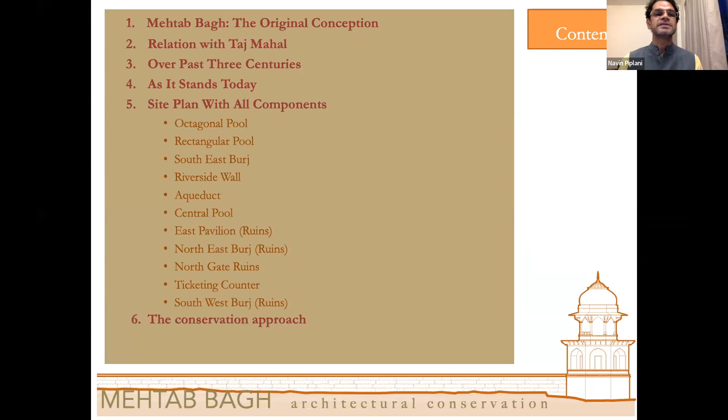This is the basic structure of the presentation today. We look at the site. We look at the relationship of the site with Taj Mahal. And how it was over the past 3 centuries, as it stands today, the site plan, and the conservation approach.

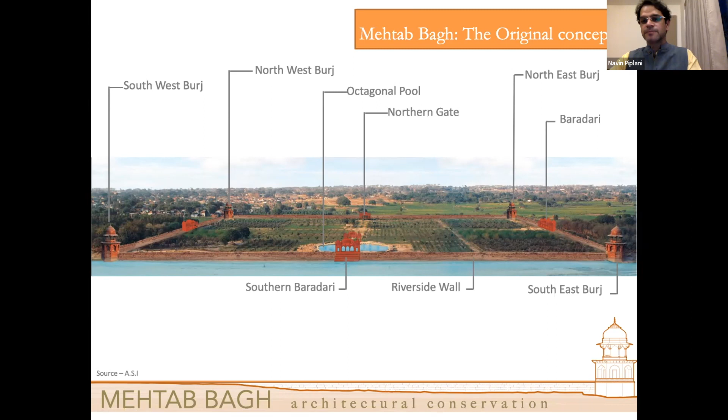Now, just on the side, most Islamic tombs, most Islamic gardens are in the center of the garden. The tomb is in the center of the garden, and Charbagh is around the tomb. It's only in the case of Taj Mahal that the tomb is moved near the river, to the edge of the garden, and therefore on the other side also the octagonal pool is moved to the edge of the garden.

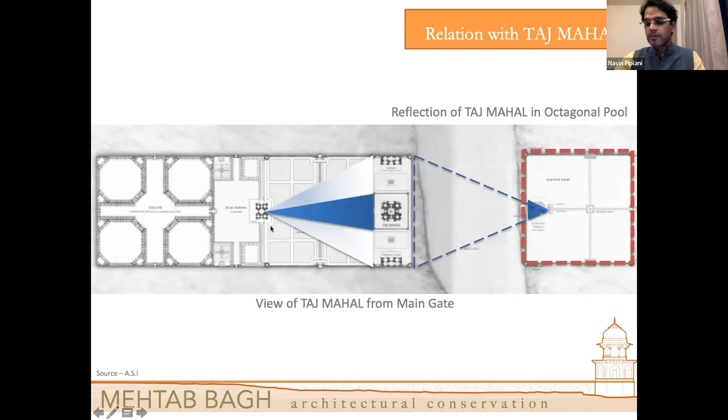That's the view of the Taj. Many of you may have visited the Taj from the pavilion. From the main gate here, this triangle originating from this platform. If you look at the Taj, you would see that, and a reflection of the Taj in the channel that leads up to the Taj.

And again, sharing a little bit of insights that we had while working. The Emperor Shah Jahan, who built the Taj in the loving memory of his dying wife, would walk on this path, on the red sandstone path. He would not walk on the path that we walk today as visitors. He would walk right next to the water channel with the fountains. So it is called the Shah Jahani path that would lead up to the mausoleum.

Now, on the right-hand side is the image of Taj Mahal as reflected in the octagonal pool, which I showed you in the drawing.

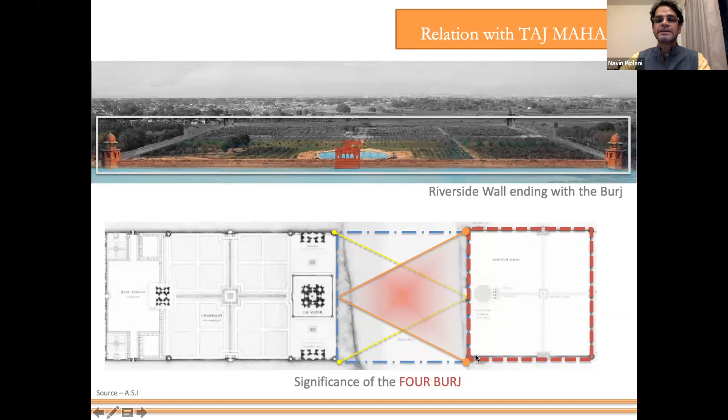So on the other side is the Mehtab Bagh, this red square, blue square is the river, and the black big rectangle on the left is the Taj Mahal. That you need to keep at the back of your head. This is how Mehtab Bagh was between 1632 and 1643, the site with the octagonal pool. And then the whole site got flooded. There are descriptions by various travelers that you would not see the Mehtab Bagh from across the river. And eventually it was all excavated in sections, and the pool came to the surface. And then there was overgrowth of vegetation in this part of the site because nobody was visiting this garden site. Everybody was only interested in the Taj Mahal.

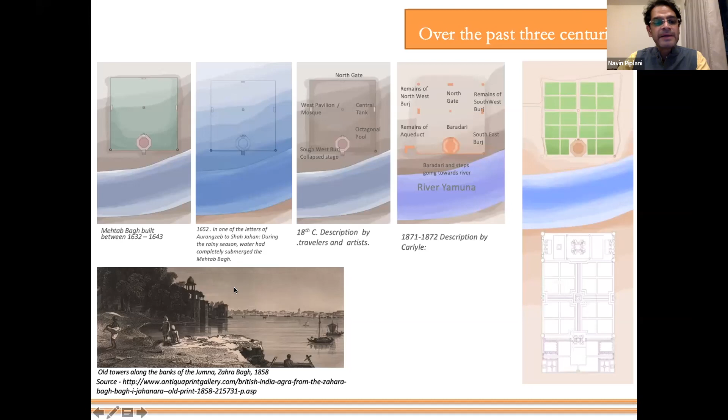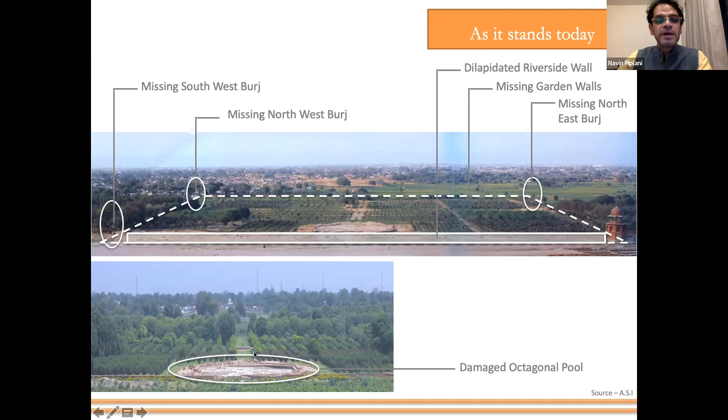This is one of the views of how the Mehtab Bagh site would have looked. And there are some interesting revelations coming up, which you would have heard or read, but we got a huge privilege to be able to provide evidence for that. So currently, there's only one burj, this pavilion, standing. All three other pavilions are not there. This is the current situation. The wall which divided the site from the river is more or less gone, and the inside of the garden is not exactly as it was. The pavilions are not there, and so on. And the octagonal pool is quite severely damaged.

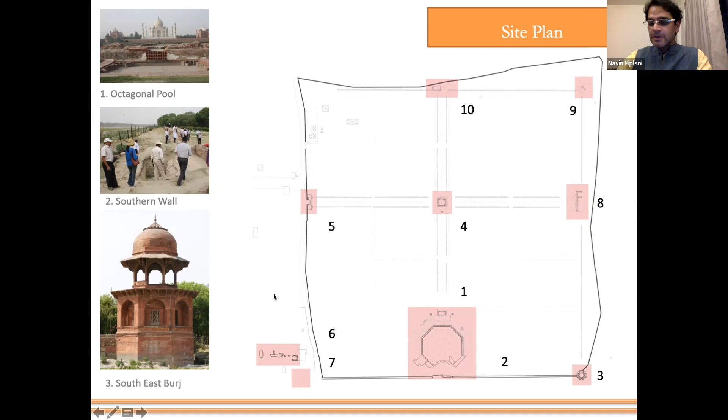This is the site. This is the pavilion. These are the work teams, and this is the pool, number one. Number two is the wall. Three is the burj that is standing. There was again a central tank. There were pavilions on the three walls. And then 6 and 7 was the water system to draw water from the river Yamuna, and it was used for watering the plants and the trees at the Mehtab Bagh and for its upkeep.

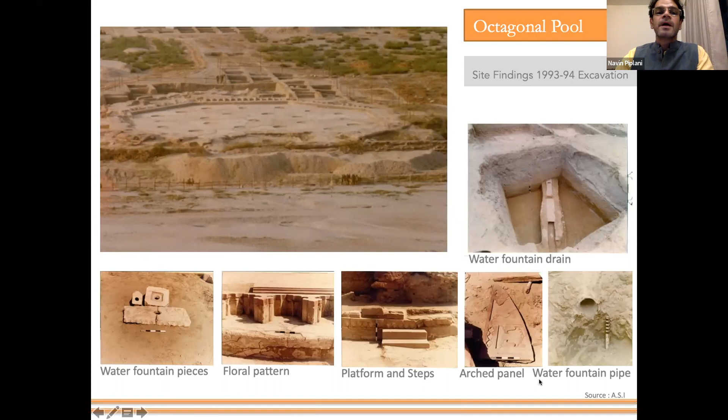So this is what the pool looks like after it was excavated. You see this deposition of sand along the wall. The fountains are gone, the baradari is gone. These are the excavation pits by the Archaeological Survey of India. And they were finding pieces of fountain, the floral pattern, the platforms, the arched panel, water fountain. This is all archaeology that was revealed, and then it was covered back. Severely damaged pool. It kind of got submerged in the waters of the river. And then when they excavated, they found it in this really sad condition.

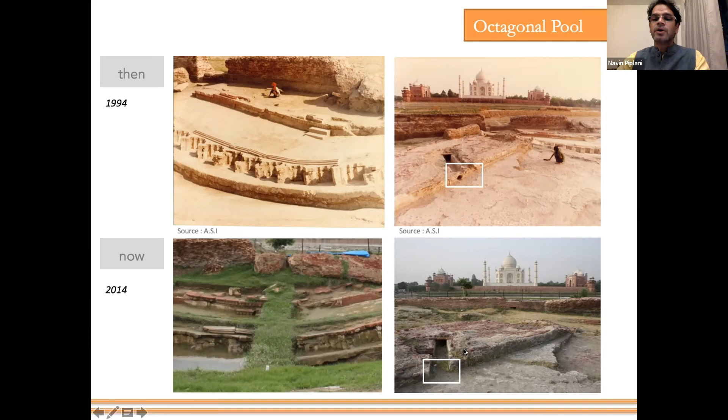And across the river, you see the view of the Taj Mahal. This is the same distance from the other side, which I showed you in the triangle. So this is how you see the Taj from the other side now, with all the trees and the vegetation gone. But if you came to the Mehtab Bagh side, then you would see the Taj Mahal in its original, authentic setting, how it would have been several centuries ago.

So the conservation team at site, this is a rectangle pool, octagonal pool, the Taj. You see how interesting it is actually. Something which is the object of attention from the other side is now in the backdrop. And we are more busy looking at the archaeology and the damage and the destruction than the Taj Mahal. That is, thousands and millions of people come to India to look at the Taj, and it's gone to the background. But this is exactly how the narrative of Taj Mahal is.

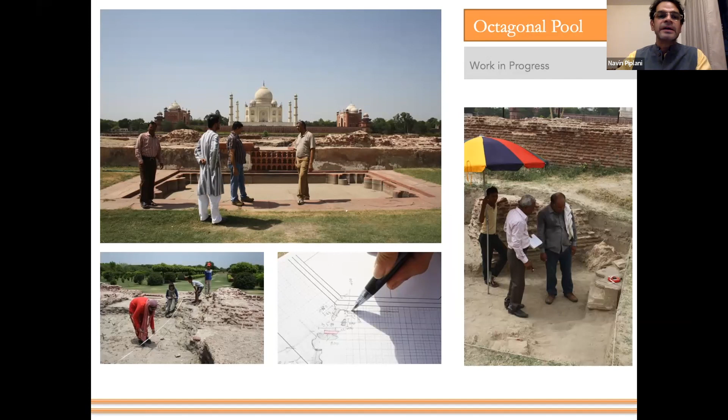It's a mausoleum. It's not a Disneyland kind of a thing where you got to celebrate, you got to do your picnic, take pictures. It's a mausoleum which reminds you of the sadness of the emperor who lost his most loved wife, and therefore it's a reminder of that loss rather than celebration of some kind of world heritage and this, that, and the other that it is subjective to.

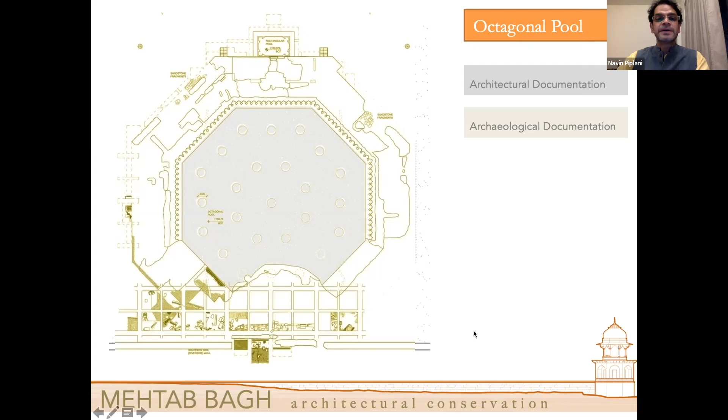Anyhow, this is how the architectural documentation of the pool was taken up, which was then overlaid by archaeological excavations, the excavations that were done by the ASI, and some bit of exploration was done while the project was on. So this grid at the bottom actually reveals the pieces which got damaged and which stayed in situ. So these pieces, stone pieces, are still there. And then the condition mapping was done over this site.

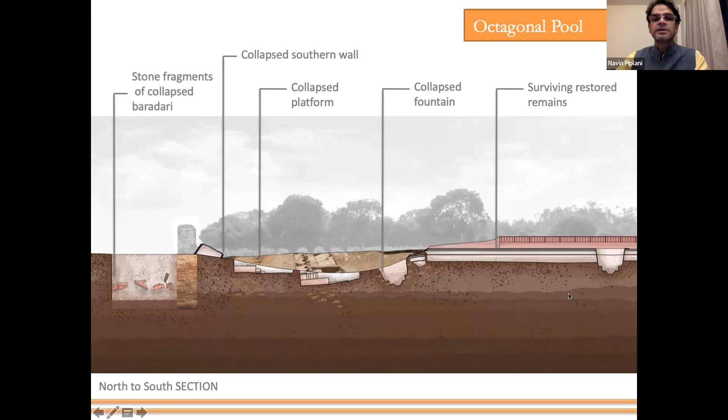This is a section that shows how the octagonal pool is in a sunken situation, with actual pieces to scale, lying as they were, buried under the earth, and the remaining part of the octagonal pool on the right-hand side. And now looking from the other side with Taj Mahal in the backdrop.

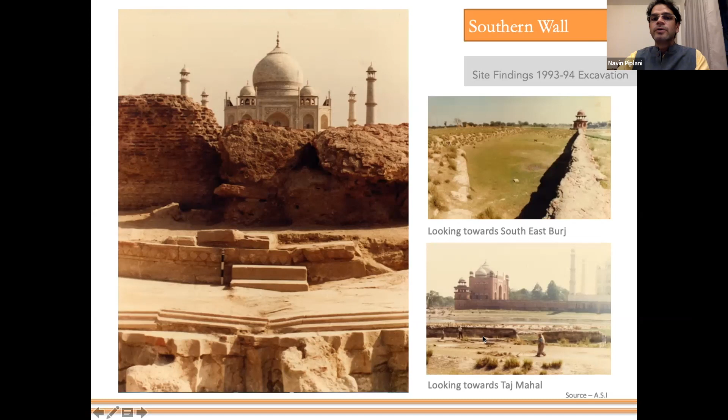This is the southern wall that I talked to you about, where it's quite a close-up. It's a real photograph. It's not photo montage. It's a real photograph of how it looks when you get so close to the wall and you look at the Taj. The wall totally damaged in pieces, and a lot of it was vandalized also because nearby village people took the stones away to make their houses and other structures.

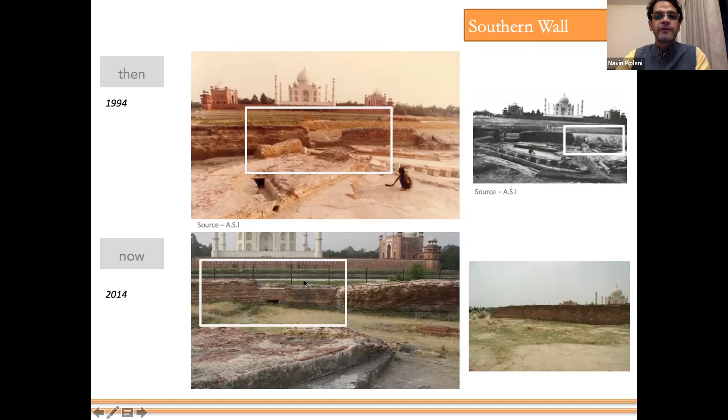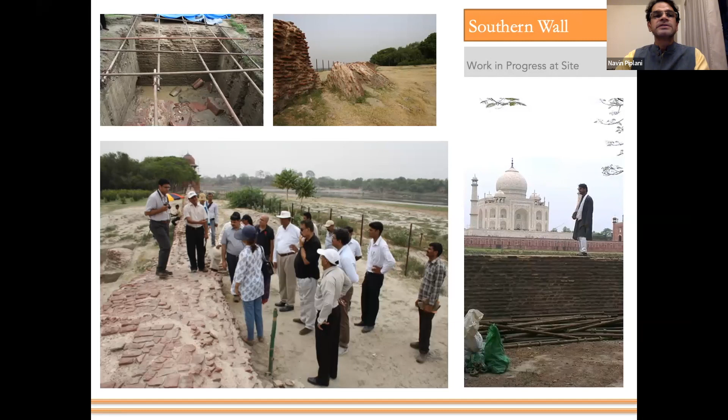But there were some evidences of water channels, as how water would have been brought into the octagonal pool, and when it overflowed, how it would have been thrown out back into the river. Now we are standing on the wall, the southern wall, and looking at this condition with engineers from IIT Madras and seismic experts and experts on geology and hydrology, because the major cause of damage to the site was floods. And again, the documentation of the site, the wall, and condition mapping.

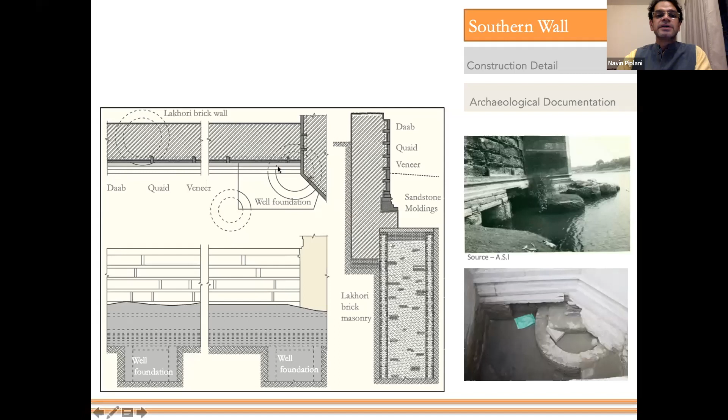Now, this is that interesting piece of information that everybody around the globe wants to know: what was the foundation system? How is it standing? The images to the bottom right and bottom left show you the wells, which is the modern day pile system. So this is a section that we had drawn to show how these masonry wells, which at that time were filled with timber, provided the foundation system for the wall and the burj, and which is exactly the same system which is on the other side on the Taj Mahal. So the entire foundation system of Taj Mahal sits on these circular wells, which are modern day piles.

A section showing how these pieces are lying buried under the ground, and the burj itself, the only lone survivor of this entire site. And you can see in the photographs how some parts of these wells are also still surviving and just keeping the site standing in place in quite a vulnerable situation. Now we are right at the well.

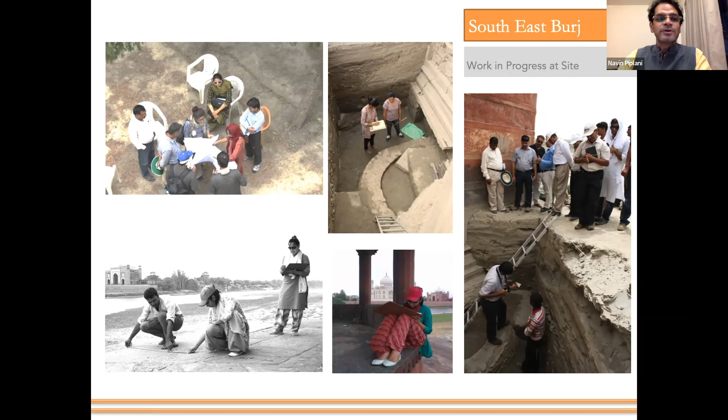So you see the excitement to an archaeologist or to an architect to go down several hundred years back and stand at the level at which the well is, where these two girls are standing, and study that site. So you're almost 400 years back studying how the whole system of buildings would have been erected in the first place. And then came the question of restoring it much later.

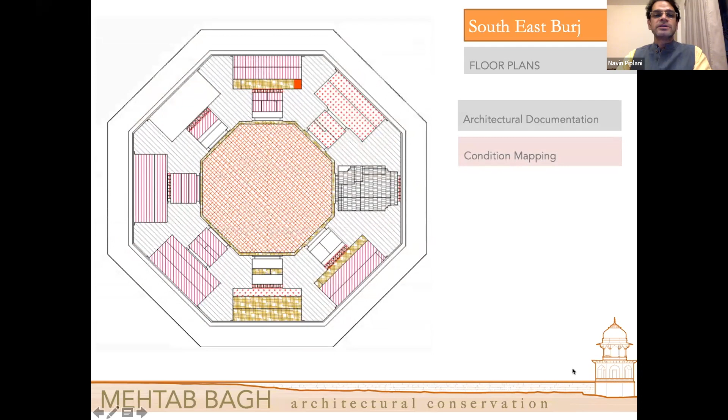These are the floor plans of the burj. I'm just showing you as a matter of documentation, not getting into the conservation of it, but how meticulous this entire site was. There's only one element left, the burj, and how it was meticulously documented and condition mapped for the conservation problem. That's the roof plan, beautiful structure, beautifully proportioned. And this is, out of the 4 burjes, the only one left, the section there, that elevation on the right.

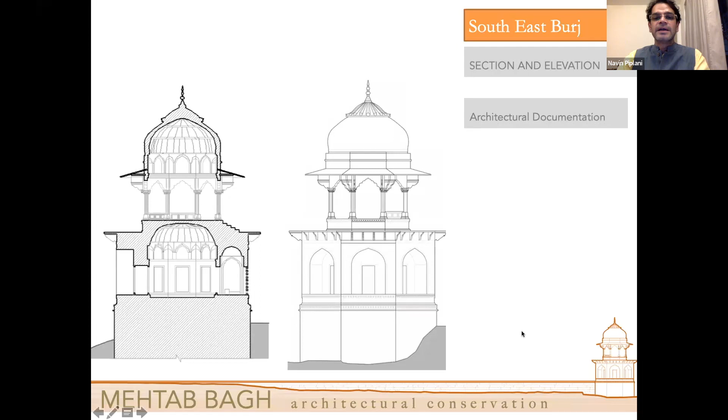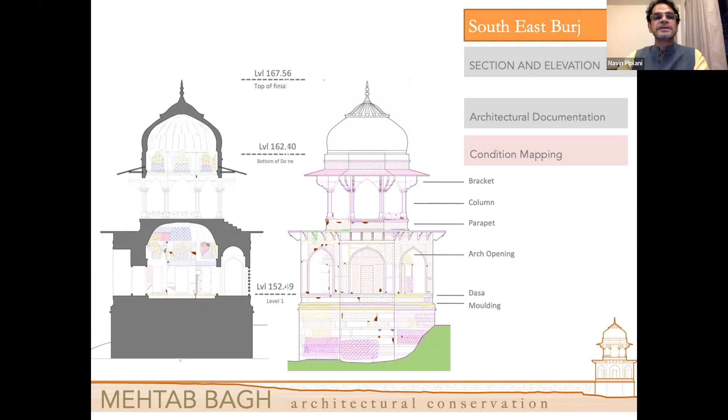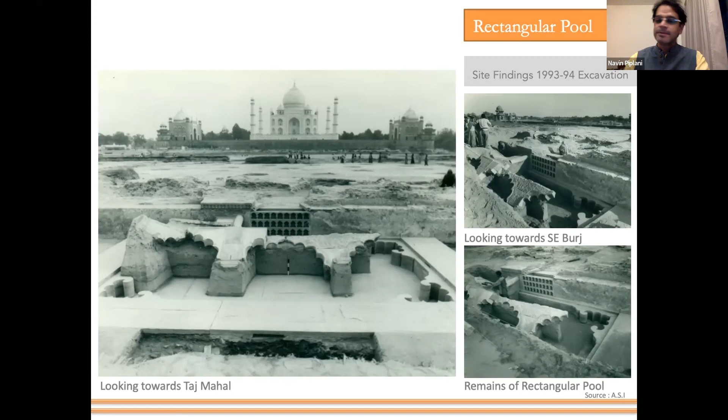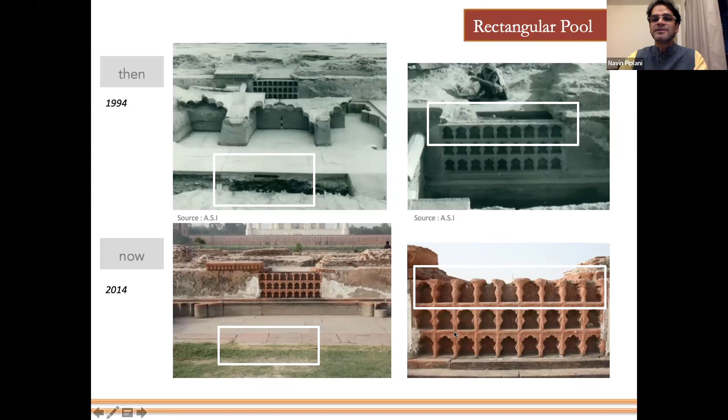And quite an immaculate imagination of the Taj Mahal, where nobody goes. This is a situation where no one goes. It has been detailed out so well. No one can imagine what happens on the other side, which is full of hundreds and thousands and millions of people. But all gone, all kind of in a very bad shape.

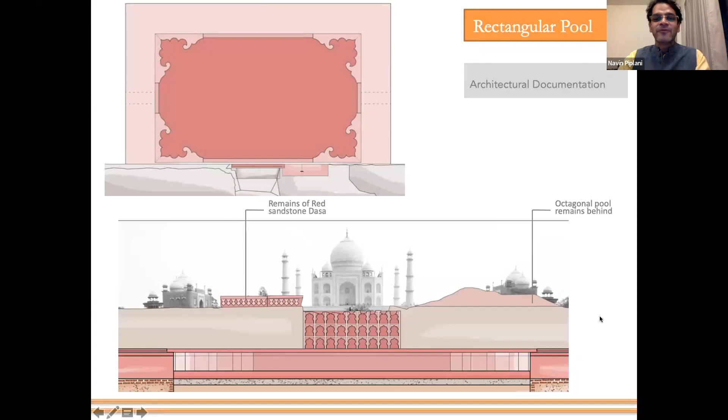But still, these are the drawings of how this rectangular pool would have looked. And even in the drawing, it looks so full of love and affection of this man for his wife, making something so delicate and yet so solid as somebody's emotion and passion obviously is. And then the condition mapping, and then the final part.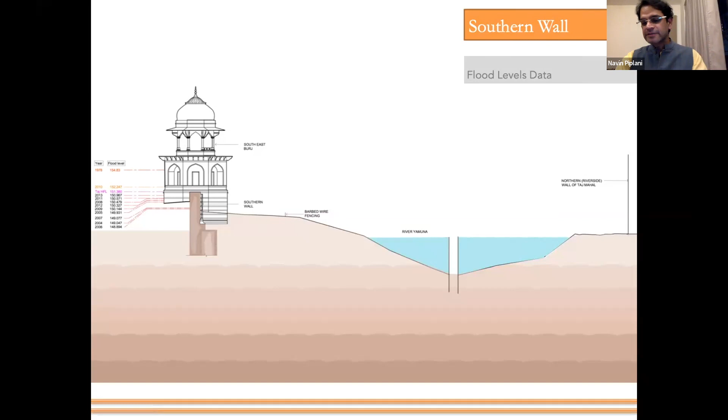Other times also the water has been rising to the level of the plinth, which means the octagonal tank on the left-hand side would mostly get flooded almost every 5 or 10 years. So that makes conservation quite difficult, that even if you were to restore or conserve it, it would get flooded next year because the wall is not there. This southern wall that we see, 1, 2, 3, 4, 5, 6, is in shambles. So what do you do?

So one possibility was to re-erect the wall, reclad the wall as it would have been, then flatten out this piece of ground level so that some control mechanism for rising water can be laid here. And that would protect the octagonal tank inside, while still leaving the tank in situ, right? We are still only looking at the wall.

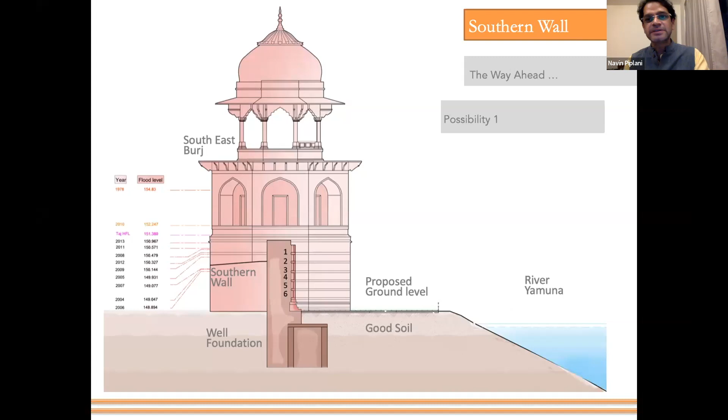And that would involve reconstruction of the wall following the same Mughal system of construction, which, as per the Archaeological Survey of India's understanding of the Venice Charter, is not allowed. They would protect the site as found. So if they have found the site in a dilapidated condition, they would keep it in the dilapidated condition, because that's their policy: preserve as found. So that's quite a difficult proposition.

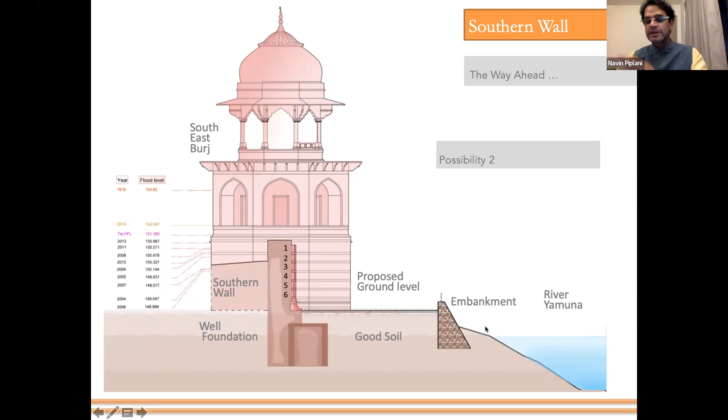Anyhow, the second possibility was to create an embankment system, like a modern-day micro dam, that would keep the river water out. Then you have your water level, then your ground level, and then you re-erect the wall. So there's a second layer of protection. Even if the first layer failed, the second layer of protection would come into play.

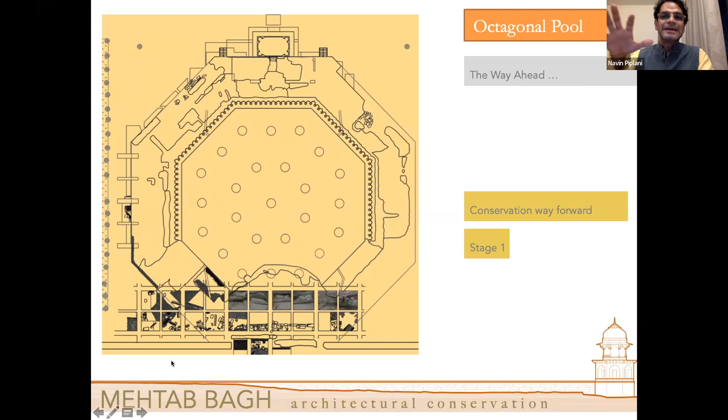Now this was done keeping in mind the restoration, or, there's no harm calling it reconstruction, that we were proposing, which was quite radical for the Archaeological Survey of India: you've got everything documented, right? You know where these pieces are, as you can see on the drawing. We know from evidences a historical damage mapping of the octagonal pool. You have all the evidence, all the documentation, all the stories.

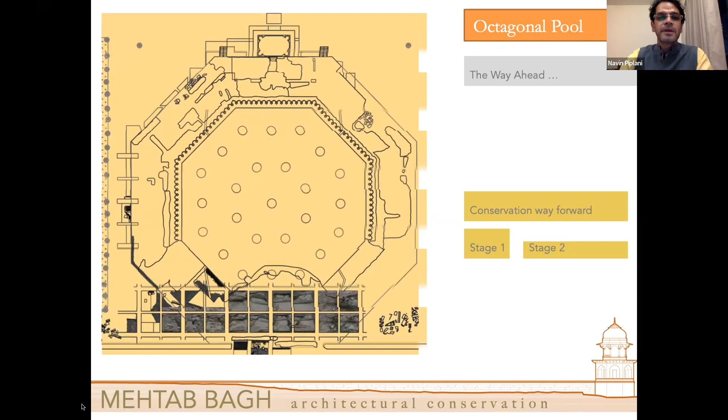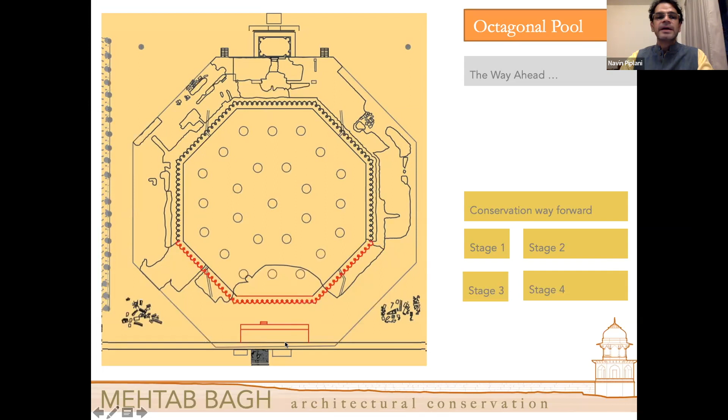Why not get all these things out which are lying buried and dilapidated, and start resurrecting the pool? So you start rebuilding whatever was in situ, let's say a couple of meters down at the same level, because it got flooded, it didn't get fired, it wasn't a building that fell, where we don't know where the pieces went. It's the caving in of the site. So we know exactly where they were. We can just reconstruct them piece by piece, fountain by fountain, pavilion by pavilion, very slowly and gently, raising this caved-in portion.

I'm showing you in stages. So this is the caved-in part, and you kind of bring it up very slowly, very gently, and try and get it back into its original level, original position.

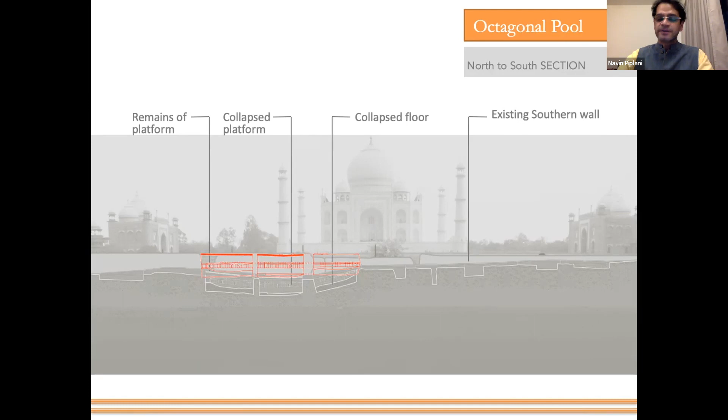This was the conceptual idea of getting the whole pool back into its original position. But this is not a historic monument or site, it is an archaeological remain, an archaeological ancient site, which is a difficult and more challenging proposition to work with. We had devised various structural calculations as to how you would do it, whether it would fail during the process, or cause more damage after being restored, because the soil underneath and the foundation system has been severely damaged due to the flooding.

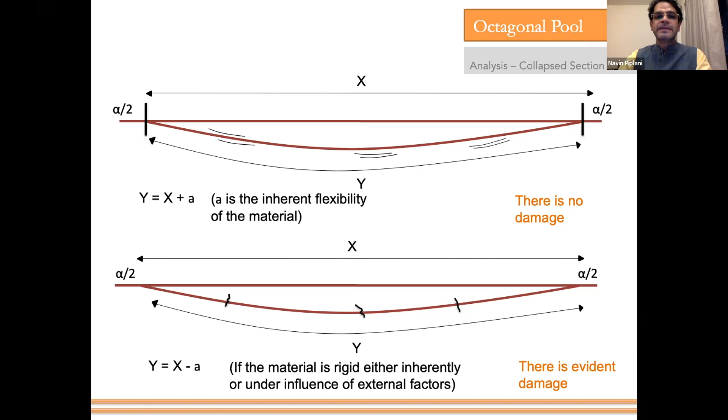The water would have gone right beneath the structure. For that, we conceptually said, look, if you were to push it up using a mechanical jacking system, obviously computer controlled, and put hundreds of these jacks, because you've divided the whole site into a grid, and then slowly push them like 1 centimeter every day, or every week, or every 15 days, and see how it behaves. Or you put a rope system underneath and try to roll it up, again grid by grid, piece by piece, and bring it to position.

But if you wanted absolutely no intervention to the archaeological site, then you may even use a system that metro uses, the subway system, where you erect two structural systems on both sides and then pull it up piece by piece, again very slowly, very gently, using the computerized system.

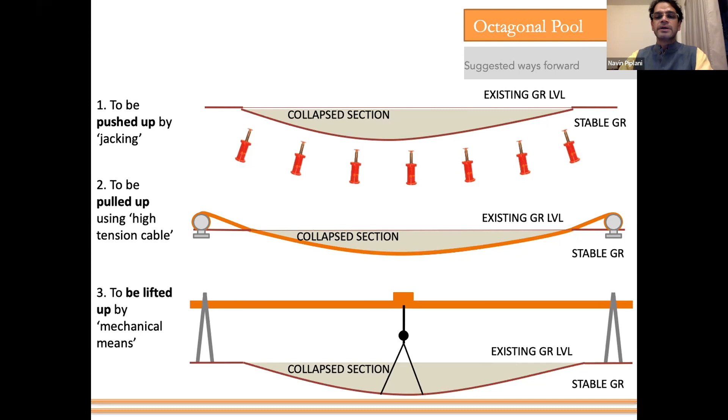So you could either go underneath the archaeological site, or be semi-underneath and mostly use the tension system to get it up, or just stay away from the archaeological site, put your props quite away, and then start lifting it up as you would use a crane to make your flyovers and things like that, because those do take place and pass through settlements and sites which don't need to be disturbed, and you have a whole system of flyover.

So we were trying to convince the Archaeological Survey of India how this could be taken up. Now we come back to the same image, but you see the pool restored to its original glory. All the four octagonal—not the four, we didn't do the other two, we just replicated this one. And we said, to complete the story, if you remember the two triangles that I showed you, to make the story complete while you're looking at Mehtab Bagh from the Taj Mahal, you would complete the story.

Similarly, when you are standing here and looking at the Taj Mahal, you would see both burjas on the other side, as you can see here. And then you get your octagonal pool back with the water fountain and the rectangular tank here.

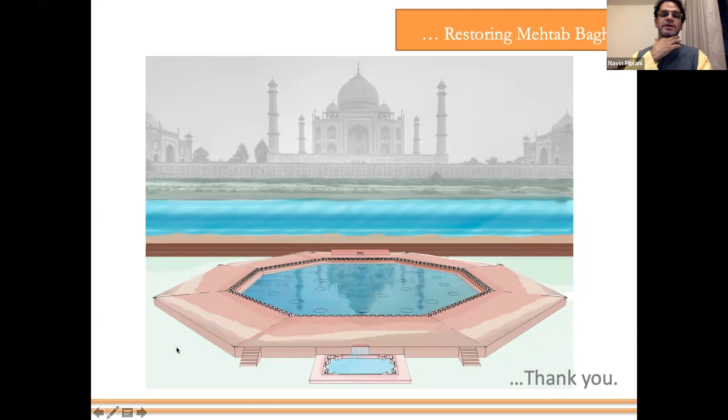You may not want to fully restore it by putting the Baradari, because Shah Jahan is not there anymore, so nobody is going to sit there and remember the memories of the wife. But at least the archaeological site would be put back in situ as it was. And this was the whole idea that we had proposed to the government of India.

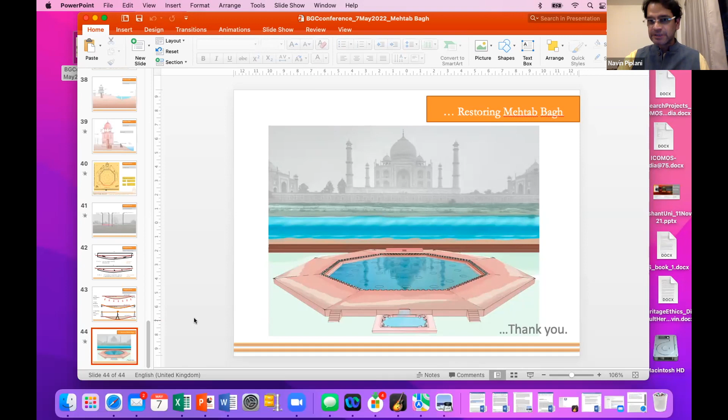And of course it didn't take place, because it was quite a radical thing, they said. One of the comments came—although Ebba Koch and representatives from the World Monuments Fund were quite supportive of this idea—that if you could do this, it's another form of looking at an archaeological site in an Indian context.

Where you would want to complete the story of the Taj Mahal, the story of Emperor Shah Jahan, looking at the mausoleum which he had built in memory of his loving wife. That is more important than keeping the archaeological site as it was—damaged, dilapidated and incomplete, and not conveying what it's supposed to convey—except that it's a fabulously interesting piece of evidence of the destruction of this archaeological site, for study by scholars and researchers.

But the idea here was to bring life back into a dead archaeological monument. Thank you so much.